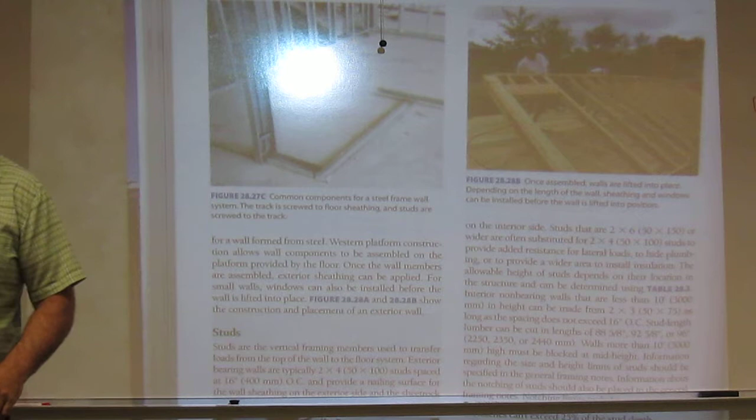What's the advantage of going with a steel wall over a wood wall? Well, a couple. Certainly not the cost - it's a little more expensive than wood, and a little harder to install, you need a special workforce. But it is dimensionally perfect. The stuff doesn't change over time.

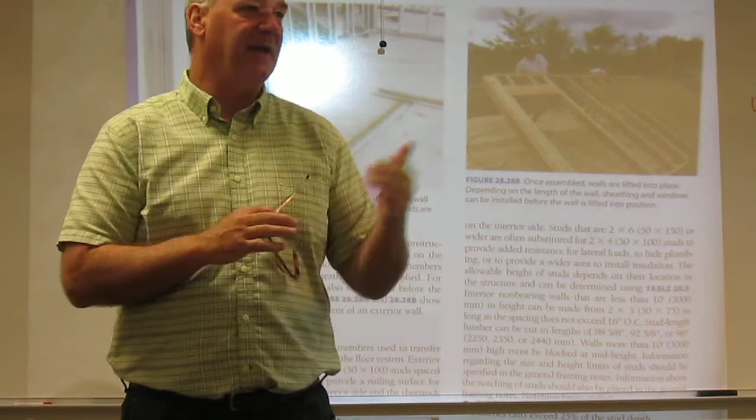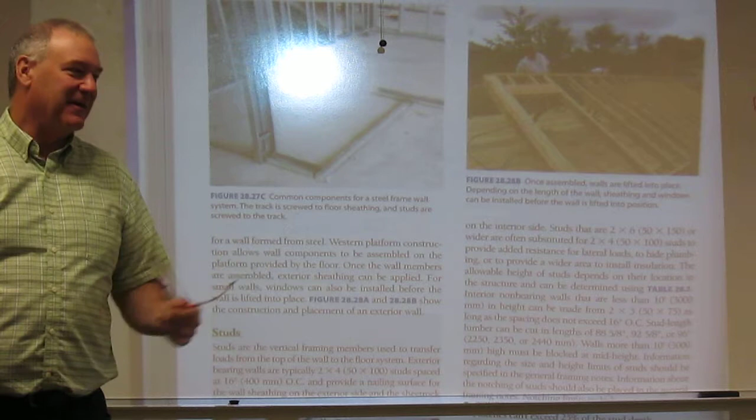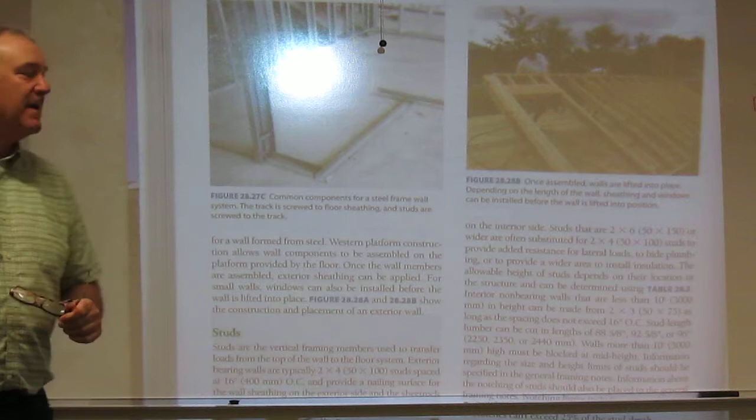In fact, you can take a galvanized piece, throw it out in the mud for 3 years, pick it back up and still use it. And also, if you've ever worked with wood and you're trying to put drywall on it and you got a 2x4 that's warped like this, you got to cut the thing out and put a new one in. This will never happen to this stuff. When it calls out and says this is 3.5 inches, it's 3.5 inches the entire way. So that's really the big advantage, is that it's dimensionally perfect and it holds its shape over time.

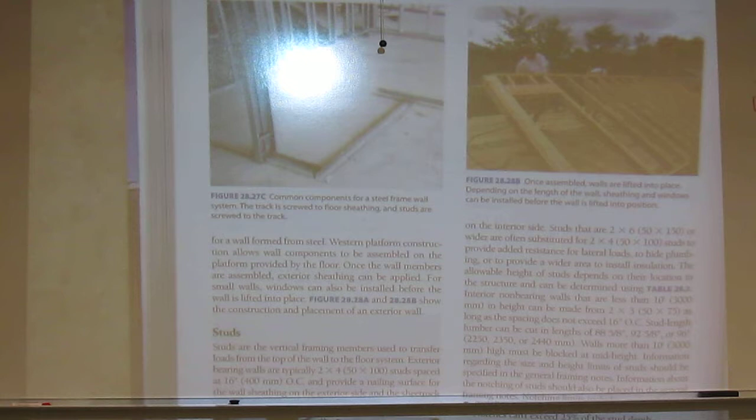So there it is being used as walls. Let's turn to page 704. And we got another picture kind of depicting the same thing, but they do add joists.

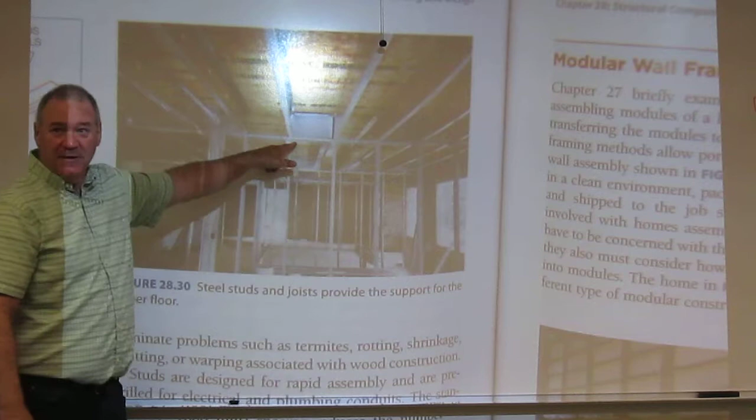Now here you see the studs, and then running across the top of them here you see joists. Again, this is very thin metal. It's got this shiny look on it because it's typically galvanized, which is an electric plating device. In essence, they charge a vat of this material, drop it in there, and then the electrons attach it, kind of like painting, right? But it protects it from the elements.

When you look at these, even the studs, they're all going to be a channel shape. I've got one piece of channel right here, which is kind of this C-looking shape. Now, this one here is a real structural piece of channel - this stuff doesn't have the big wide portions down at the bottom, so it's pretty much straight. So here you see it being used as walls and floors, carrying the platform.

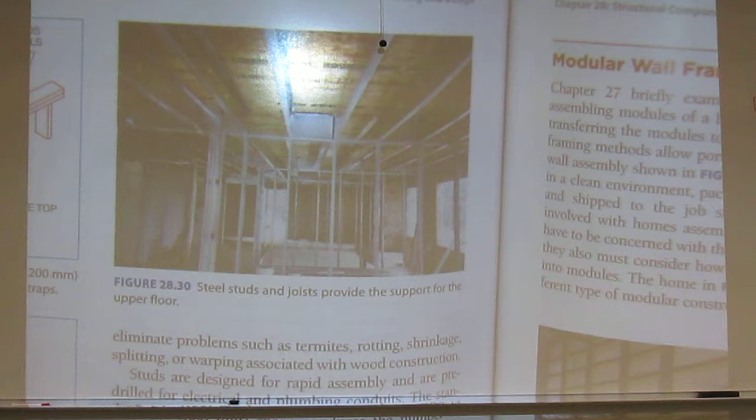Please stop me if you have any questions.

So when they're building the house, though, didn't we see it where they had that and then you put the wood in it? Yeah, inside of it, yeah, like for door frames and stuff. We need a fastening device to hold it.

One thing is the steel that is used for walls and joists and stuff, since it's so thin, it is susceptible to buckling. By that, you put enough weight on it, it won't resist the force. That's why one of your questions for review is how high can you go with this stuff. And I think they recommended don't go above 5 floors, because the higher it gets, the more it's going to be susceptible to buckling.

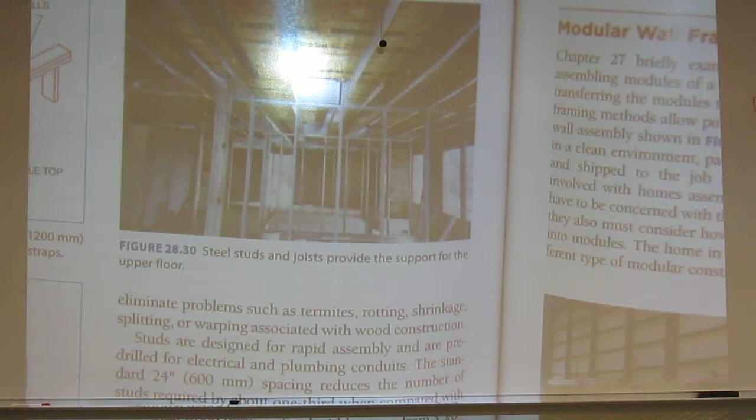And that's what this stuff is kind of like - you want to be a little careful with it, especially whenever you screw into it, you kind of get that. You can't really see it in either one of these pictures, but I'm going to go back one picture and kind of readdress that question.

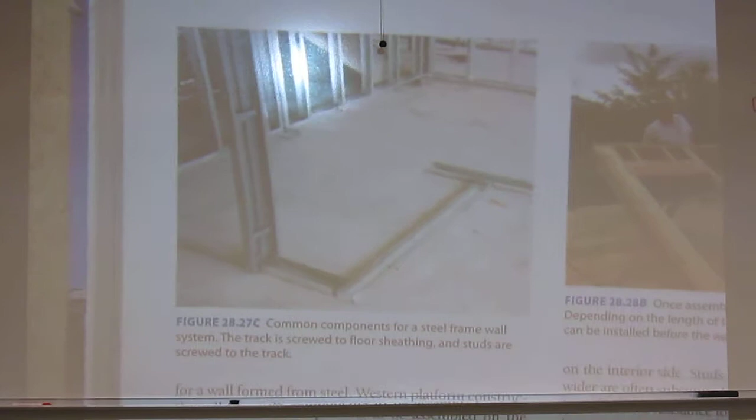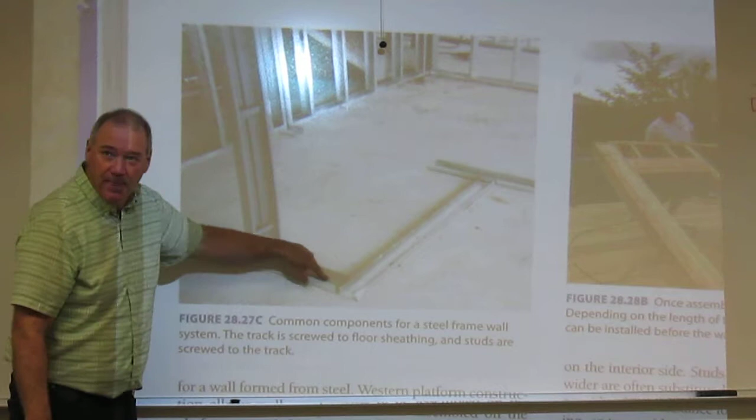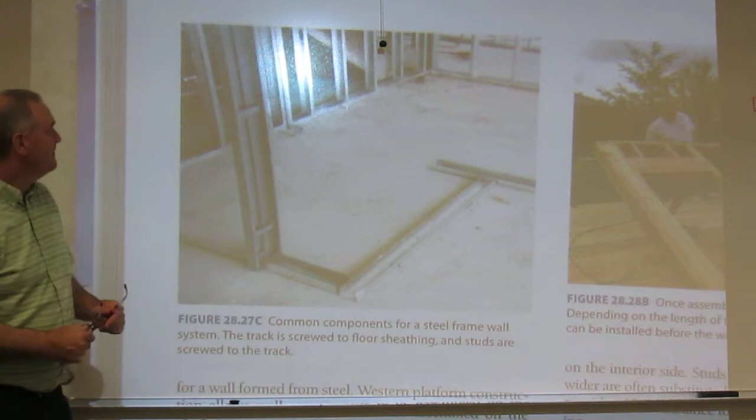You'll notice this one's a bigger piece, but it's the same concept. See that little tray in there? Since this thing's 3.5 inches, you can slide a 2x4 right into that area, and then these flanges sitting on the edge are the same width. It just snaps right in, and that gives you something to screw into without deforming or weakening them. That's where we use them, only around window frames, door frames, when we need a fastening device. Other than that, it's just fine.

I've always heard don't do a steel building because you'll never hear the radio, or it'll screw with your cell phone. I've yet to see that. My personal observation is I've been in a few homes. My dad had one, I helped him put it together, and yeah, we got cable, everything worked just fine. Cell phones worked. Everything was good.

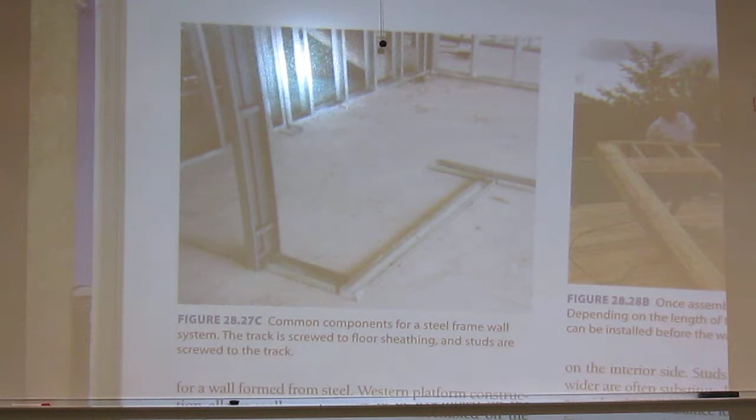Any other questions on that? Okay, all right, let's go look at some more.

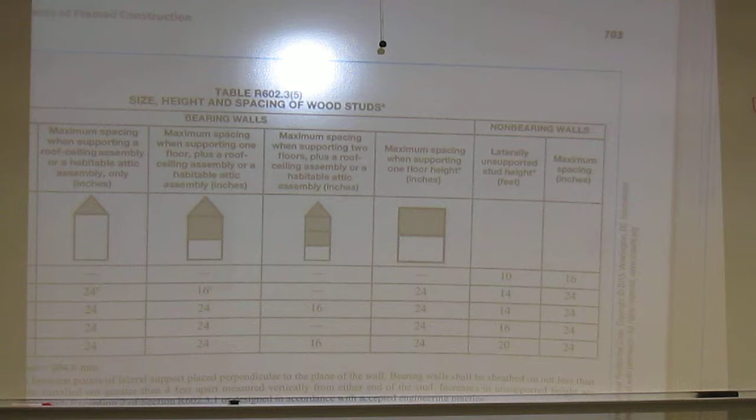That's really walls and joists, which are structural items, of course, but not like what we really attribute structural steel for in the commercial industry. Now we're going to look at some of that. So back to page 42, figure 42-25.

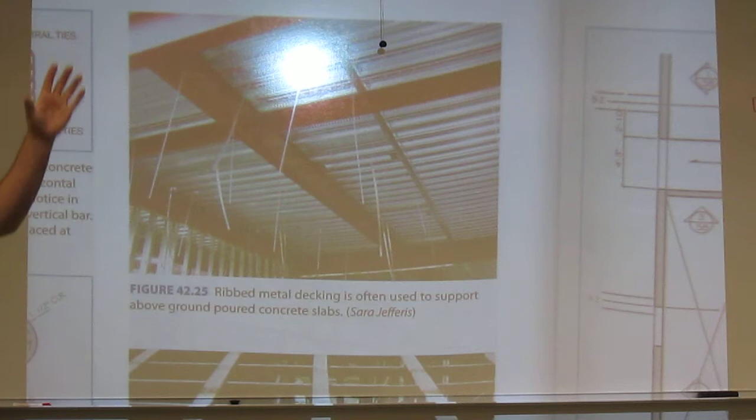We looked at this picture yesterday for the steel decking, which is another platform steel device. But here I wanted you to see the beam setup. I kind of wonder why I'm using pictures when we've got all this stuff sitting in the hallway too. I think we need to walk out and look at some of the jointing, which we'll plan on hitting on Monday. But that won't stop you at lectures out to go walk around. That's one of the reasons this building was left open, so you folks can see that stuff.

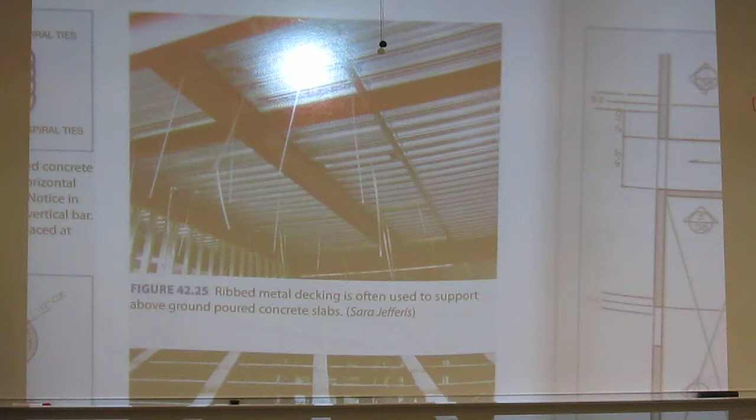Yes, Sherry. So when we talked yesterday about the steel decking, one thing I wasn't sure about was, you leave that in place, don't you? Yeah. So you don't have to worry about the weight of the steel or the deck? No, but we would calculate it once we knew it. Remember we used 20 pounds of dead load just as an all-encompassing value, so that rolls into the dead load.

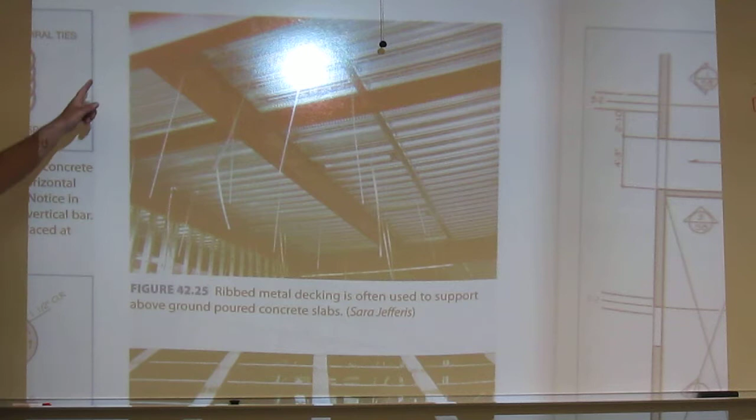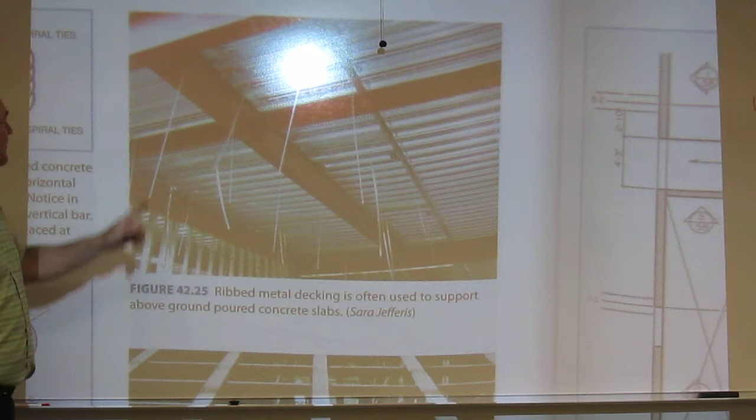So here we see the beams up, that's what we're looking at in this picture. Here we have a main one, and here we have one that's acting a little bit like a purlin. So these might be considered like girders. Remember we talked about girders in a roof, they're a main supporting beam. And then we have purlins, which do intermediate spans. Here you see that setup. This one's supporting the steel deck up above it.

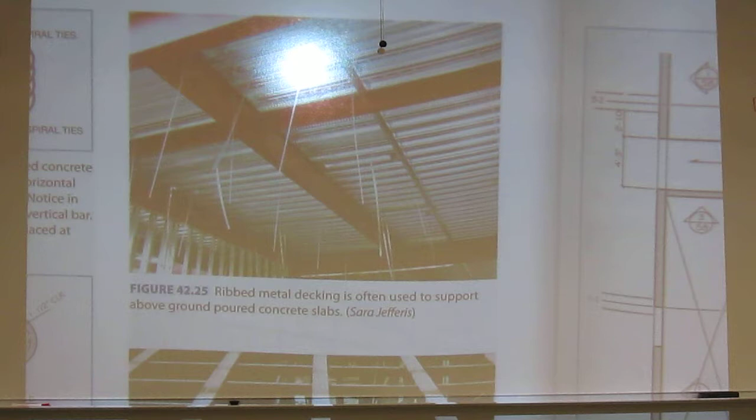Good, look at them. It's hard to see in this picture, but if you look in close on those joints, you'll see these joints done several ways. Generally they are bolted when you put them up, so they might have a bolt hole or two. Now the bolts could be the connection device themselves. Sometimes we'll just put a bolt in to hold it long enough for a welder to get up there and permanently fasten it with a weld. Sometimes we do both, that joint in between those two. We'll talk about jointing on Monday.

We got some more beams. Let's go to figure 35, page 1070.

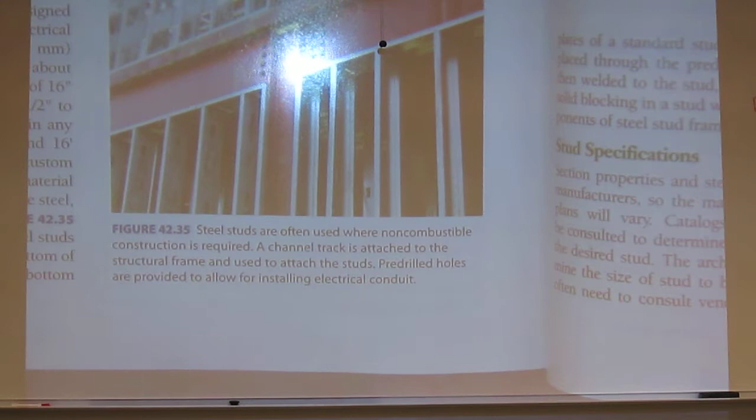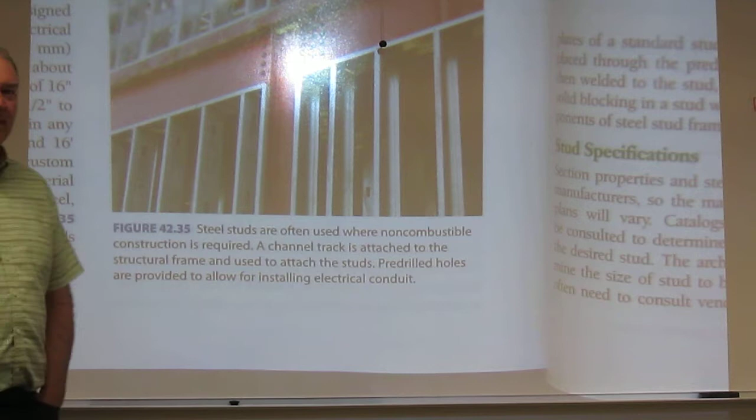Is it the same thing where sometimes it's A36 and sometimes it's K60, or are these always the same? They're typically 36 in a building. You can get 60,000 PSI stuff, but we only use that in extreme situations.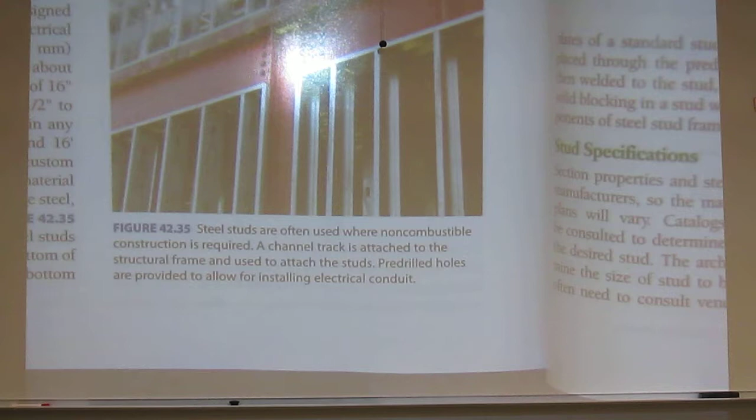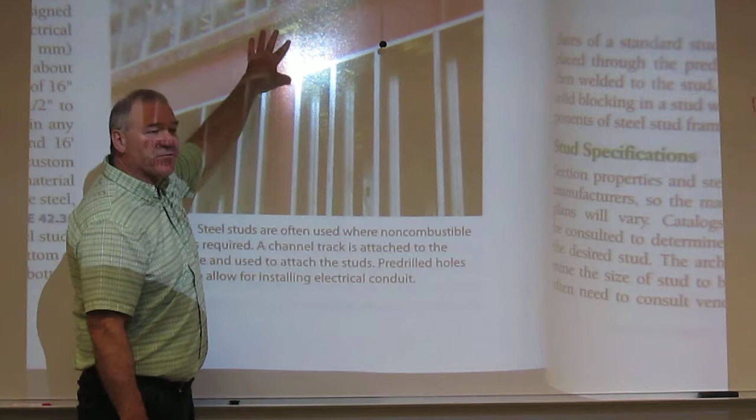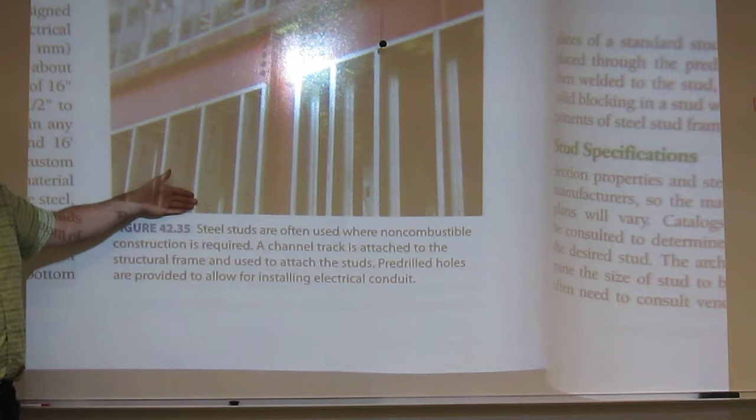So here you see kind of all scenarios. We have some big beams coming through, we also see it in a column, that's the supporting structure of the structure. You see the walls here where they've got those floor joist channel pieces filling these spaces in as walls. These aren't carrying anything, they're just filling the space in. What you're carrying the loads with is this beam and columns. I just got a little backwards as I pointed to them, I always get those two mixed up.

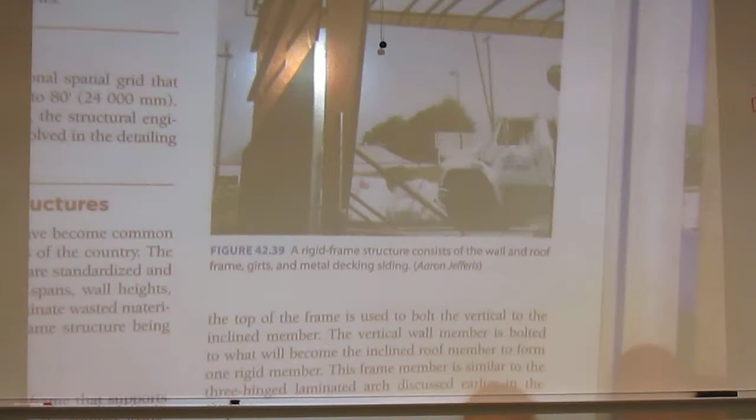And of course, the same one we looked at for girts and purlins. Here you see some kind of custom columns and beams in place.

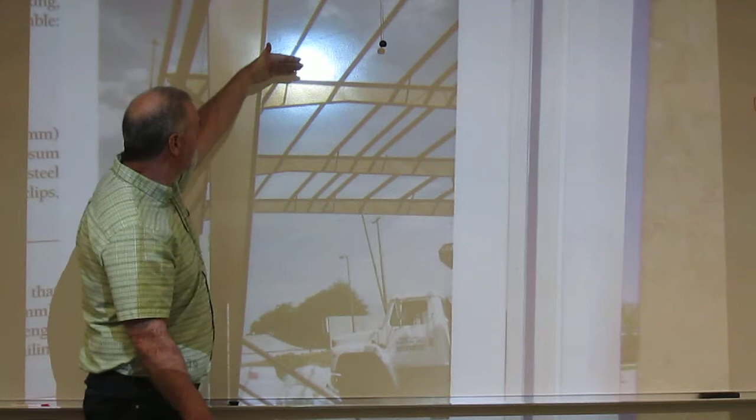It was kind of nice for those of you that got the chance to go to Boise and Western Trailer. Remember seeing these things being made where they were using plate steel through here? Then they had an automatic welder that welded plate steel to the top for their truck beds. Same process for these things. These are generally, I'm sure they can forge them, but generally they're made in some plant out of plate.

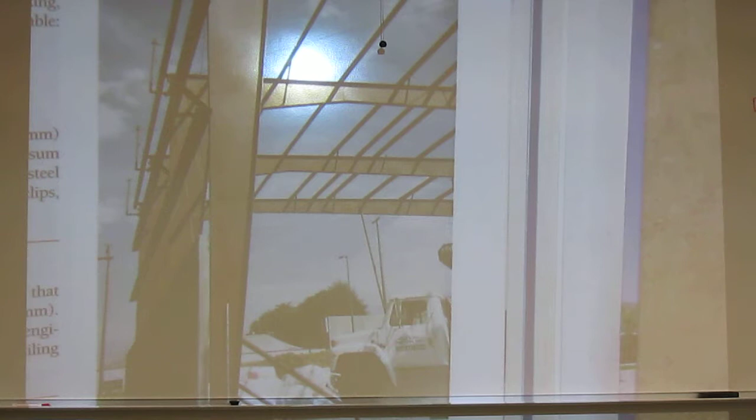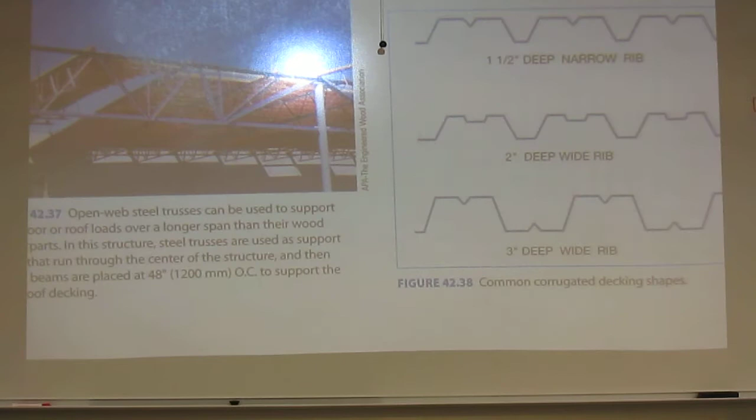I couldn't really find the best picture of a truss system, but figure 42-37 in our text comes close. This is a box truss, and here you can kind of see we're using, in this case, angle to create a supporting structure. A box truss is what we'd call this. But pipe works really well for this stuff too.

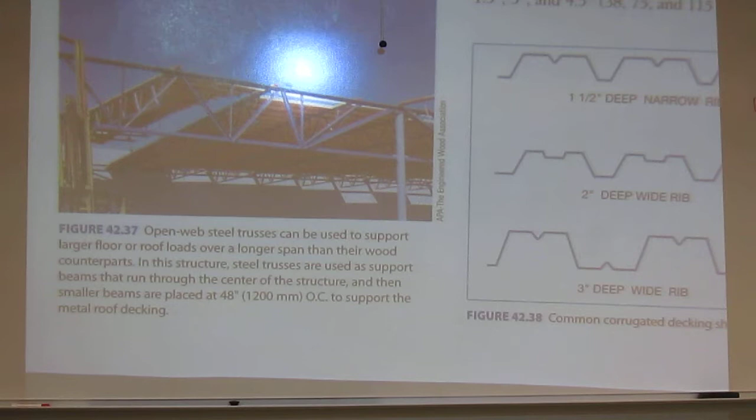In fact, Sean, where you do all your practicing in the Expo Center, if you ever get a chance to climb into that roof, it's a truss system that is nothing but, I think, 3/4 galvanized pipe. There are quite a few of them up there. That's how they span that huge distance, with those trusses. You can use it for that also.

Now keep in mind, we're seeing it as structural. You use steel in a lot of different ways. We have straps all the time. Go back to your foundation chapters, you're going to see straps everywhere where we're tying concrete to wood or something of that nature. Nails are a steel function, right?

I usually talk about nails, and we will be talking about nails when we get into wood. Because in essence, it's a steel product, it's carbon steel. But at the same time, we're only using it for this material, so it kind of goes more with wood.

Hangers, look back into the floor chapters. You're going to see hangers everywhere on those engineered floor joists, on beams, the whole 9 yards. They're always done pretty much with metal.

You have a lot of little miscellaneous additives. Maybe a big one I never mentioned, rebar. We talked about it yesterday, right? Good marriage there with concrete and steel. So we have a lot of different places we use it. As far as the plans go, any questions so far?

The plans for this stuff is awesome. It's a line drawing. This is figure 42-41. You're going to see two types of drawings used with steel. You're going to see a plan type view, which is like this one. Here we just see a bunch of lines, and we have some text laid along the lines, and we're just calling out the material.

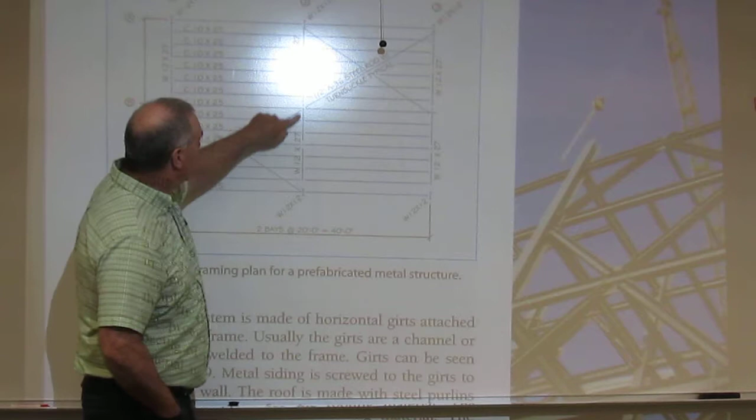So in essence, if I look at this line right here, using some line type, they've got it as a center line, and they just label right along it W12 by 27. That tells you what you're getting, so you're going to put one of these guys up there.

Now on top of that, we've got some other things going on. We've got these pieces coming along. The C means a channel. So it's a channel 10 by 25. That's also going to go up there.

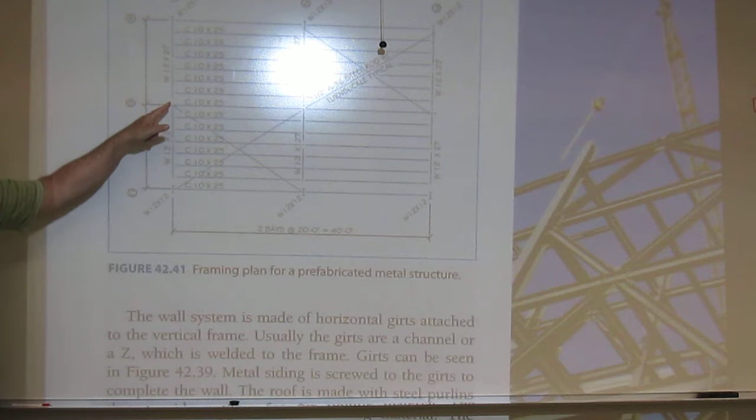In essence, pretty tough drafting, isn't it? Draw a few lines, put a little text on it, and you're walking away from it. Now, what does the W mean? We're going to come into that in a second. W means wide flange beam. So there's the drafting for it in the plan view.

Now, this type of drawing is what you find in an engineering architectural office—what an architectural, civil, or mechanical drafter would put together. At some point, we go to the detail stage. This may happen in an engineering architectural office, or it may happen at a fabricator. Not all the time do people have the skills to do steel detailing in an engineering office—that's really not what they're there for.

They're there just to say this thing's going to carry it, somebody else figure out the jointing on it. And so it would go to somebody like K&T Steel, where they have fabricators and detailers, and that's what they do. In fact, a student from last year's program is the lead drafter at K&T right now. They've got another one at Charmat doing the same thing. So those jobs are out there doing that type of stuff.

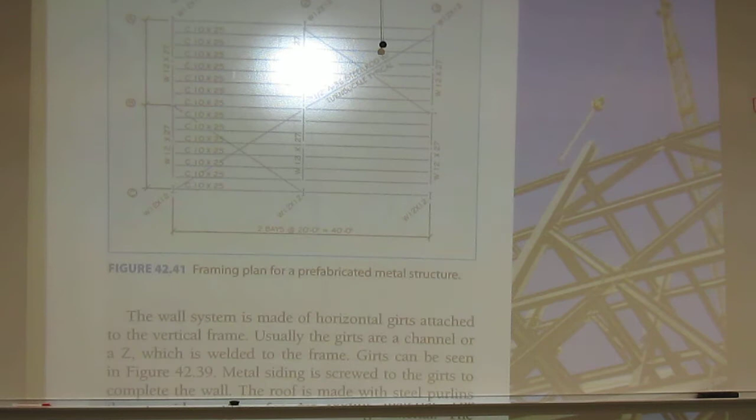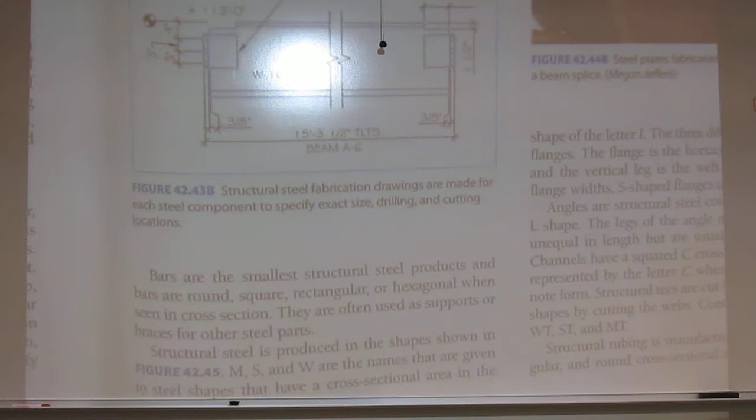When you talk about a detail, you're going to the opposite page where we start looking at like figure 42.43B, where here you see a detail drawing showing that wide flange beam. But here we're going to say, oh, I need a hole cut here for a bolt to go through, so you're going to dimension that hole and locate it. Here we're going to put some clips on it for something, so we're going to add some material to it, cut some holes in it, or whatever the case might be.

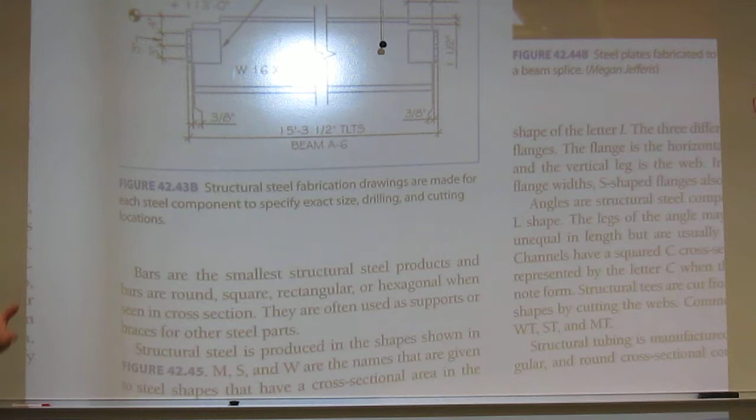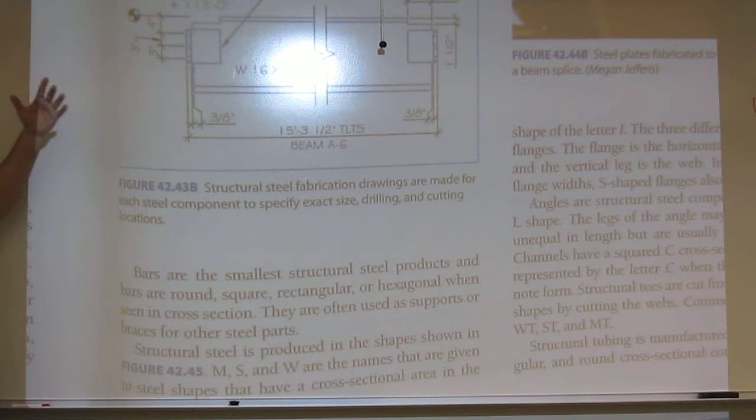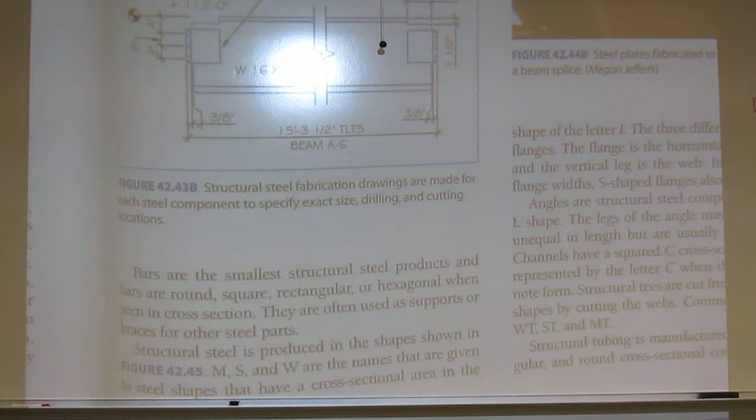Here they're coming in, call this a cope. They're going to cope the top of this because it's going to be welded or bolted right here onto another one. So here's where they would do the multi-view drawing of the beam for fabrication. That's called detailing, and in fact these drafters are the only ones out there that can call themselves detailers, because that's what they do.

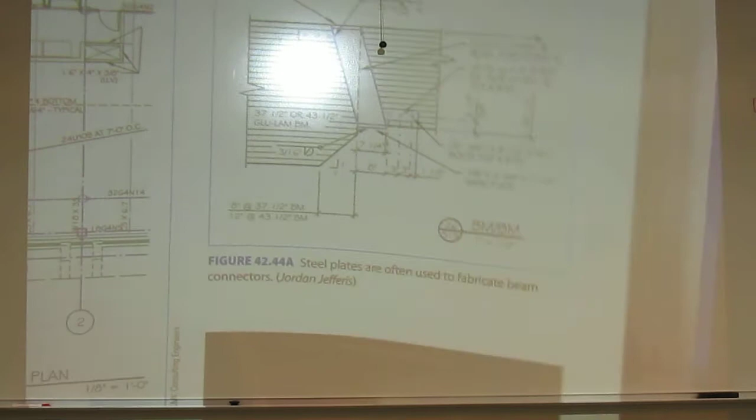Multi-view drawings of steel. You've got quite a few of these around here. Another real good one is figure 42.46, for detail.

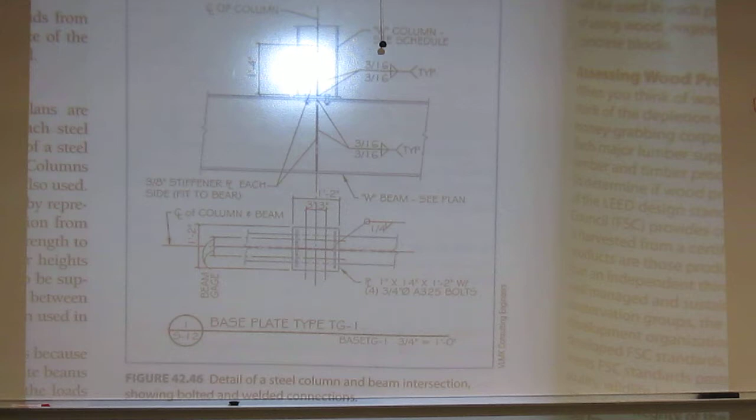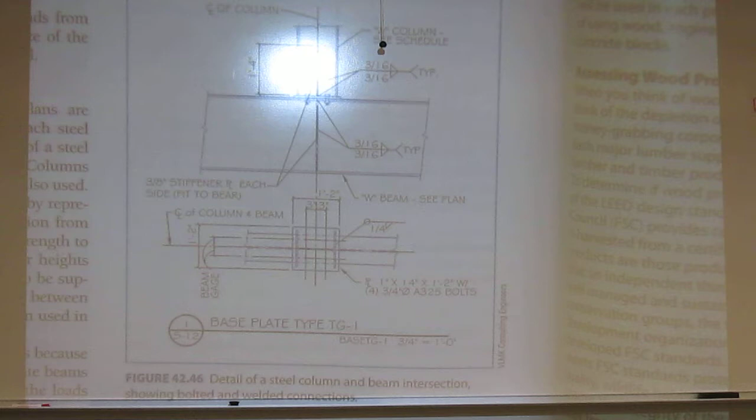So here we have a 2-view drawing showing how we have some type of beam coming along. We're going to put a plate on here, cut some holes in it to bolt. Here we're going to have this column come up, we're going to weld something on right here, it looks like a little stiffener, to put it in. So this is my top view, that's my front view—tells everybody what I need to do to put that together. Nothing new there.

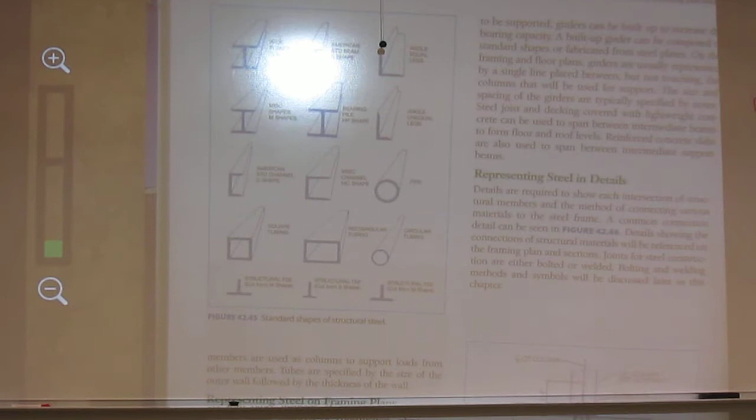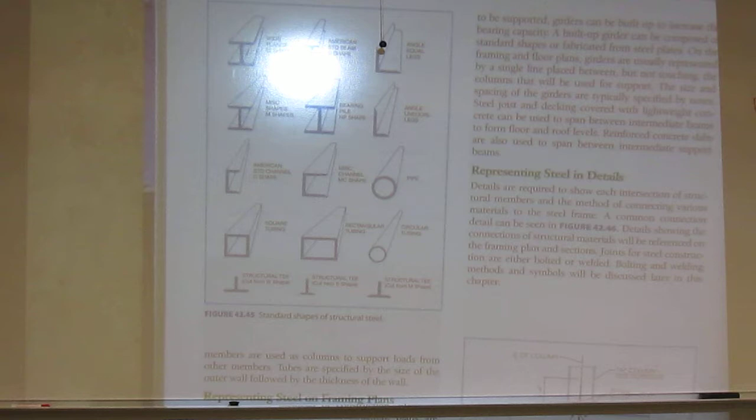All right, that's kind of it on steel, other than the standard manufactured shapes that we can buy from a foundry. Any questions before we leave drawings and stuff? Again, that drawing set back there has a lot of details on this—it'd be a good resource for you to browse through.

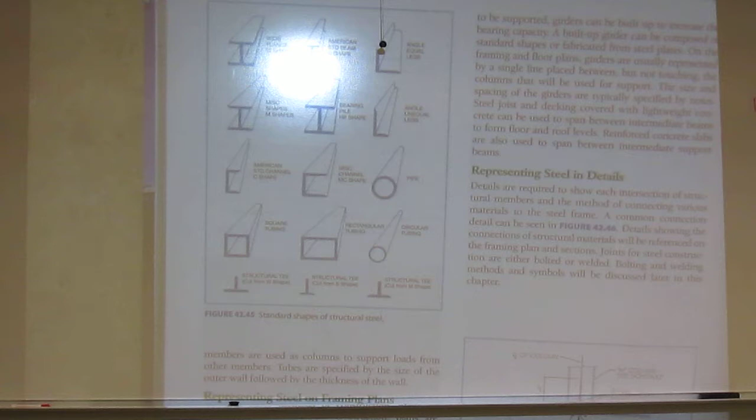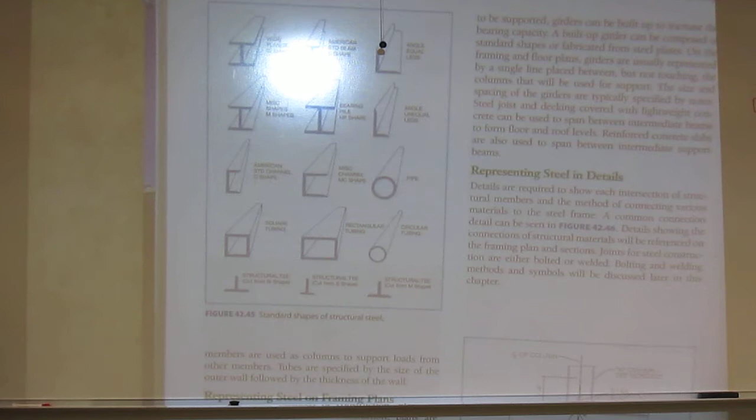All right, so let's look at the shapes. Now we have some that are pretty similar—notice like right through here, we have these four that look through here. Do you see any I-beams in there? Because that's what everybody calls these things, right? That's a generic term—walk off the street, oh, that's an I-beam. We actually don't make I-beams. There's really no such thing in today's world. In essence, the closest we can get to an I-beam is this pile, the HP shape.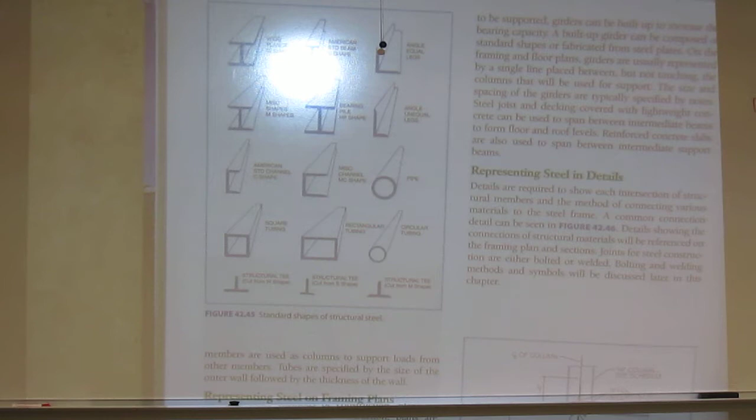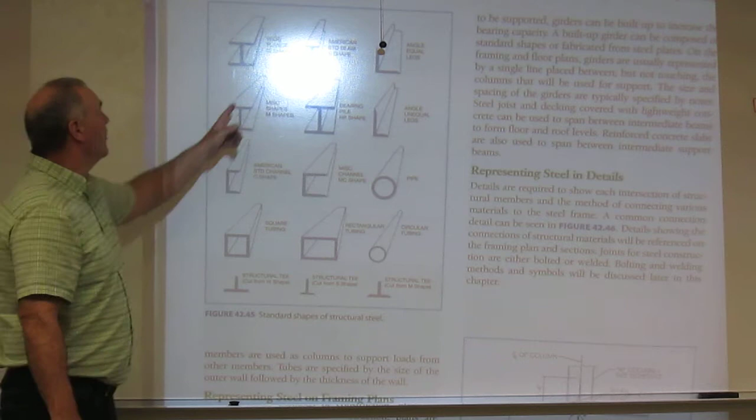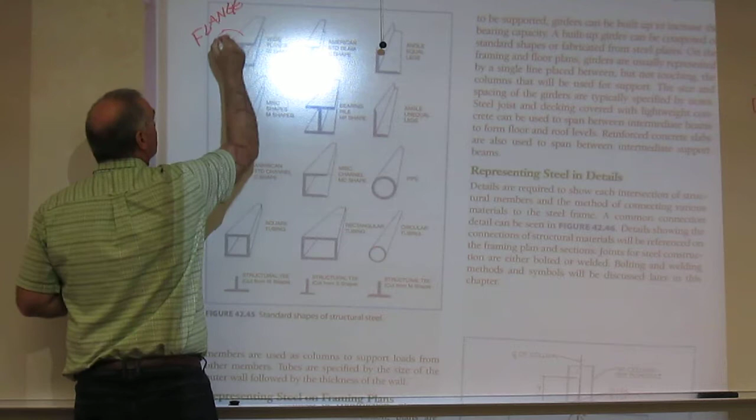That's like the old I-beam. What we've now done is we've changed these shapes, since we're getting these things actually cast, so we can do them for different situations. So when we do these, we've got to call them out by the right ones. The most common is a W shape—it's a good generic one, it has a wide enough flange at the top. By the way, when you're looking at these shapes, the top piece is a flange, that's the top and bottom. The middle piece is a web.

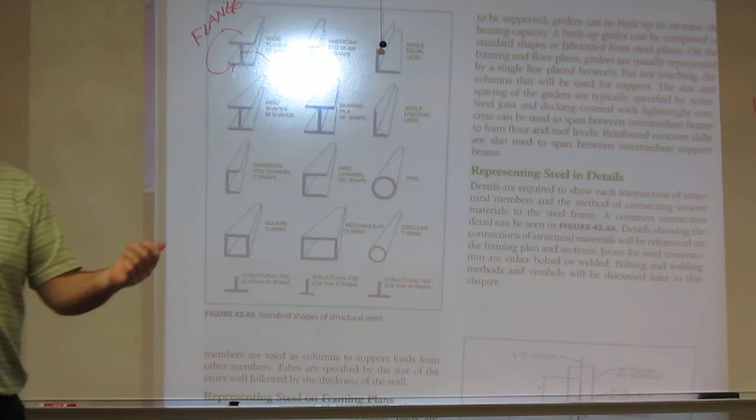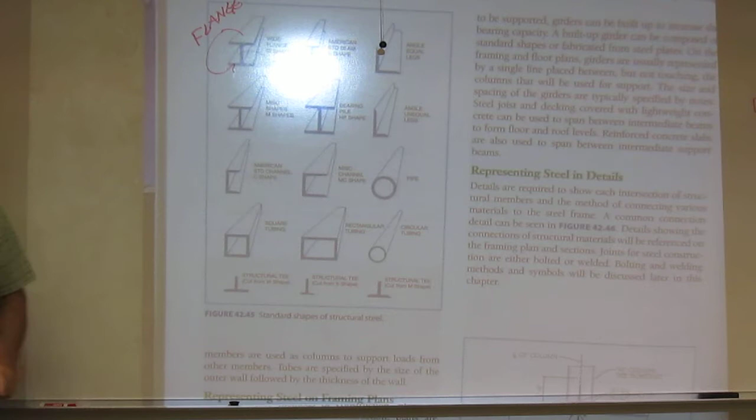The W shape is the most commonly used one—it's a good all-purpose shape. We can use it for columns, we can use it for beams, we can use it for everything. The S beam is the next one. Notice the difference in the shape on these two. I actually have the two, and I'm going to pass them around so you can look at them right now. So these are very similar to what they can do.

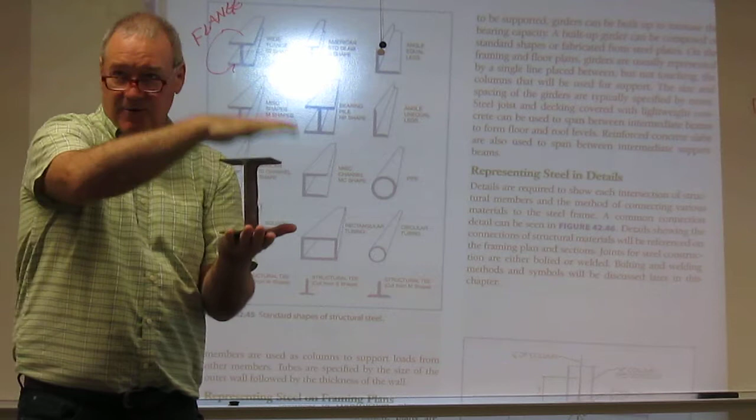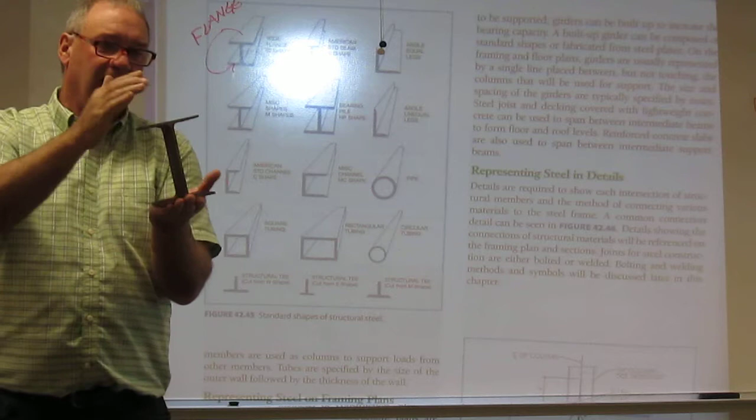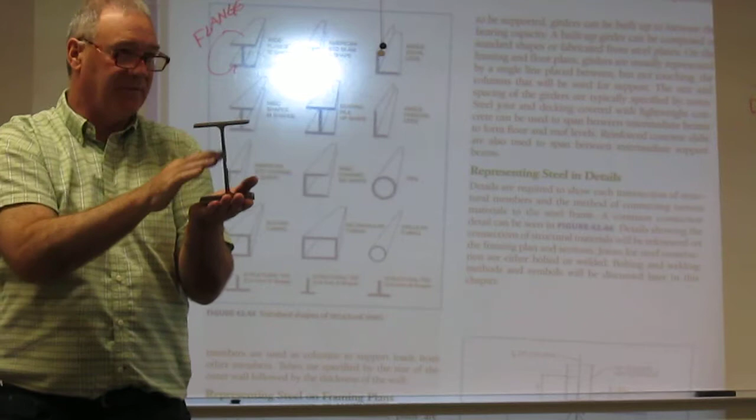This is a W shape. Now pay attention to this area right up in here, because we put a weight on this—due to the web, this side is carrying this side, but now I've got a moment arm, so it carries more. That's what the web's for, to connect those two so we can get that lever action going. Makes it a lot stronger. But when you see this top piece right up in here, what that's for is so you get a weight and then something deflects on this side, something deflects on that side. How is it going to work with the web in the bottom piece? Will it kind of roll and fluctuate, or won't it?

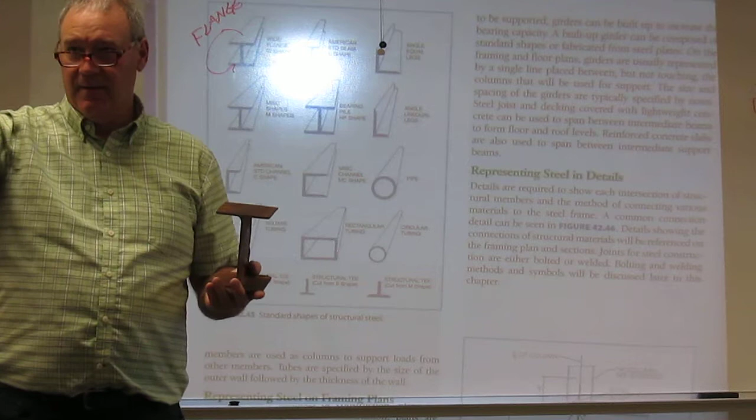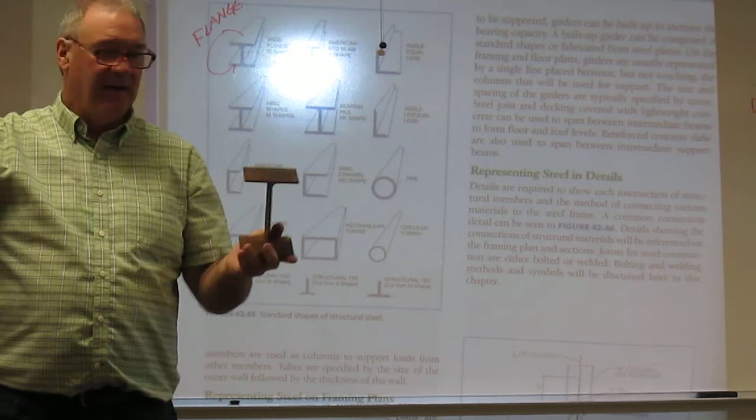Look at the one on this one—it is much, much thicker. So this one does not handle sideways loads as well as this one, but I can get more weight on this one for how much material I use. So this is an S shape, this one's a W shape. Just kind of look at the differences.

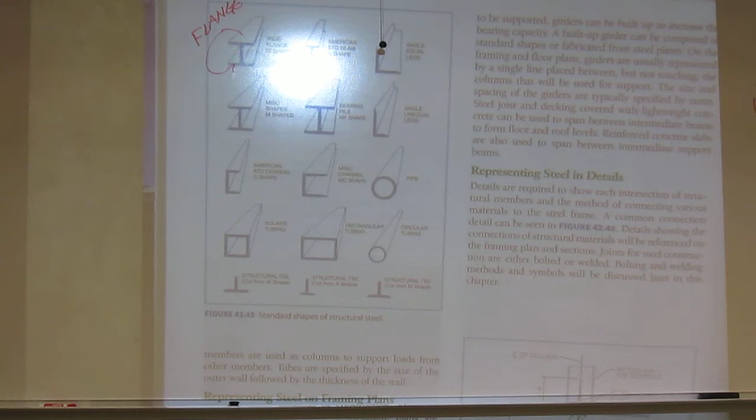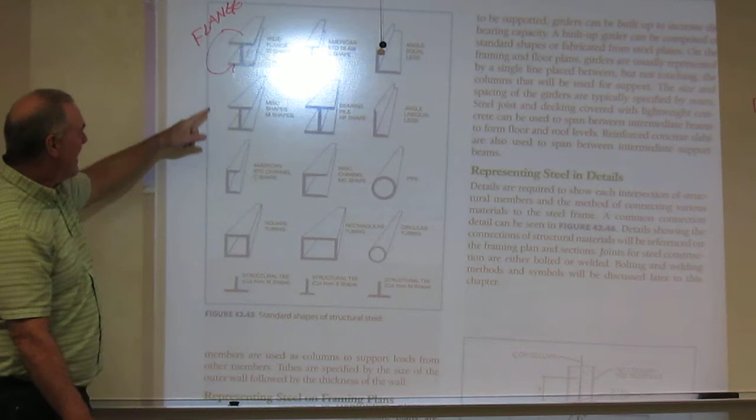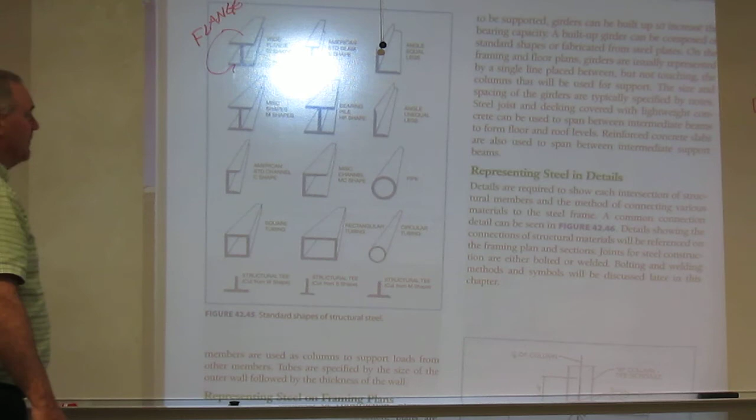So those are our two biggies right there. I have seen M shapes used quite a bit. The M shape is a little different in that the flanges get wider on the M shape—so the flanges are wider, they're a real heavy beam, the M shape. And then of course you've got your pilings, which are our old I-beams. They look basically like an I-beam. When we say pilings, these are the types that we usually protect somehow—we're driving them down in the mud.